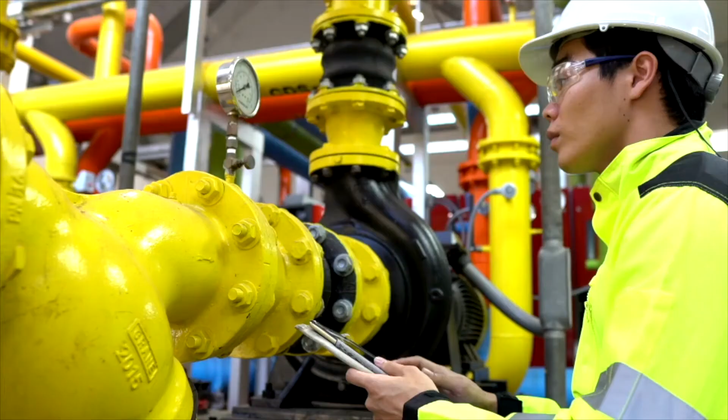So I want to talk to you a little bit today about what LNG is, how it's made, how it's stored. I want to talk about how it's used, and I want to talk about some LNG hazards. And this will, I think, complete an overall picture for you about what we're hoping to do or what we can accomplish with LNG in helping Europe.

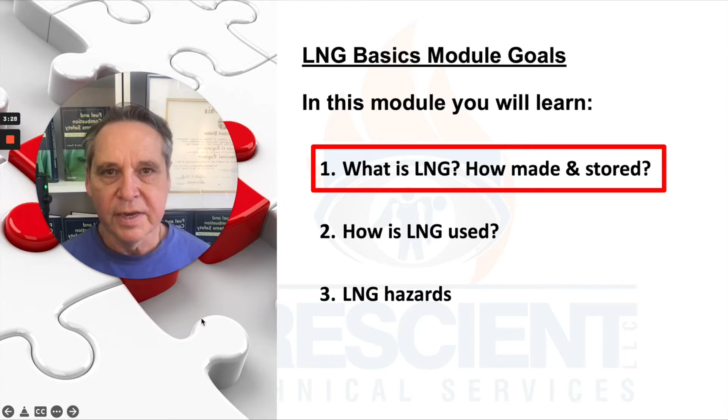LNG was originally developed as a means to help balance pipeline supplies. So quite some time ago, when there was a limited number of wells, wells produce at some rate, and it's usually a declining rate from when they're first discovered and put into service. That's why you always have to have new wells coming online. But if you think about it, most of natural gas usage, at least here in the United States, it's a seasonal type of thing. A lot of it's used for space heat. So you got this big seasonal imbalance. Well, how do you deal with that?

Well, in some places there are caverns to be able to store gas. They store it under pressure. But in other places where there's no other storage available, the technology has been developed to first liquefy it, which means you get it very, very cold and it changes phase, just like steam comes out of liquid water. Well, natural gas comes out of liquid natural gas, or vice versa. You condense steam into water. Well, you can condense, in essence, natural gas. The first evolution of this was to create liquid natural gas and to use it to supplement pipeline capacity. And then it was in later years, kind of recently, that it's been able to be exported.

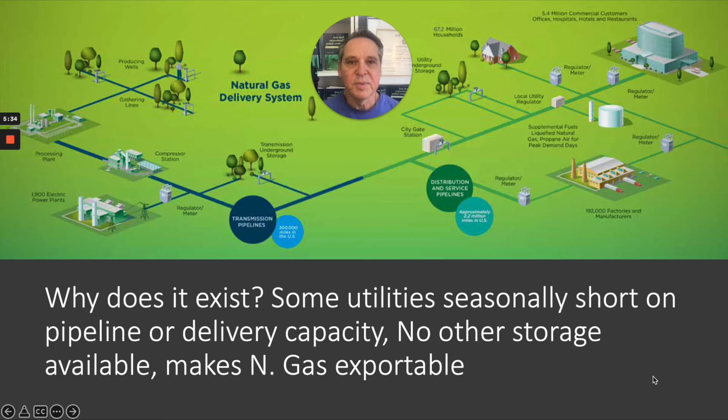There is a safety standard, by the way, if you're interested in some of the details of how this is done safely, requirements for constructing facilities and operating them. Well, they're in NFPA 59A. I'm a recent member of the NFPA 59A committee. You've got to remember that LNG, well, it's liquefied natural gas, but the commercial term natural gas means that something is typically 95% methane and 5% other things, some other hydrocarbons, maybe some inerts, but LNG is 100% methane. So it's created and stored as a liquid at minus 268 degrees Fahrenheit.

When you first take natural gas, you've got to then take it to a facility, an LNG plant, where you've got to remove all of those other things so that you just have pure methane, because they don't behave the same when you try to get them very, very cold. They condense at different temperatures and they have different properties and characteristics that are not desirable if they stay in the mix. So you get it very, very cold, suddenly it condenses, it turns into a liquid, and it's a 600 to 1 volume reduction. Then in very specially designed structures, tanks that have special chemical compositions of the steel, and that was learned the hard way, and I'll show you that in a few slides.

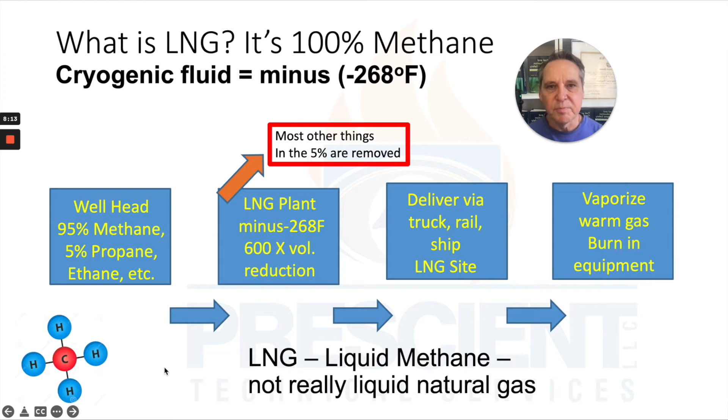You can store this, you can truck it around, you can send it on ships, on rail cars, and you could take it to a site that has vaporization equipment. You then have to vaporize it so you get substantial quantities of the gas available. Then you can inject that into a pipeline. A few more details I'm going to go over about that.

So throughout the United States, throughout Europe, there are interstate pipelines. There may be 1,000, 1,500 pounds pressure. Local distribution companies like your local gas supplier might take off of this pipeline. They reduce it in pressure, and they may or may not have a liquefaction plant. That's where you're actually condensing or turning this gas into a liquid.

So one of the struggles with providing LNG to Europe is that we likely have to have more liquefaction plants created here in the United States. It's very specialized equipment. There are compressors involved to create the refrigeration cycle needed to get very cold temperatures. It's very long lead time. It's very complex. You have to have permitting and siting for the locations of these facilities.

You have to have storage tanks on site to store what you've liquefied. And it's all a very highly regulated, highly complex, very intricate process. You just don't decide to create one of these and throw it up in a few months. They're typically years in planning and construction.

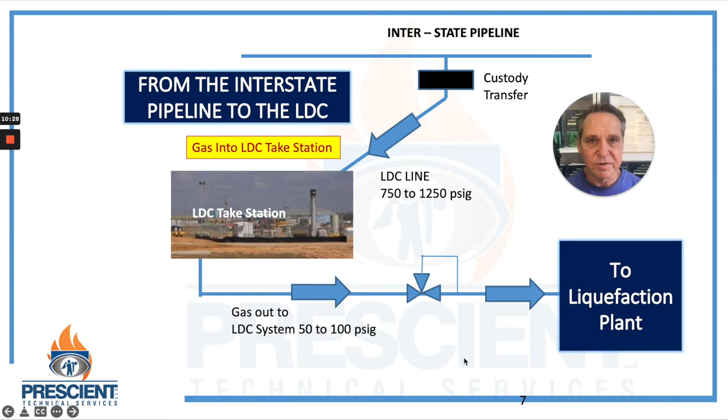Like I said, these tanks are typically double-walled, insulated. They're specially constructed with a lot of things considered in the planning. There's typically diking or some type of distance requirements in case there's leaks. There's been all kinds of testing and analysis of how to locate these, how to protect these kinds of tanks, what they should be created from. And typically these are very, very large tanks. And again, very specialized construction.

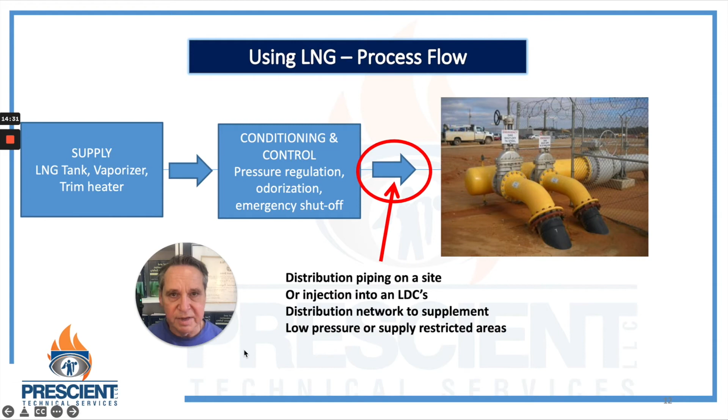And we slowly, gently transfer heat from the water into those coils, and it vaporizes, boils, if you will, that very, very cold liquid and turns it back into a gas. But you may have many, many burners and large quantities of these water baths to actually vaporize lots and lots of LNG at the same time. So again, I'm showing you this because I'm trying to get the idea in your head.

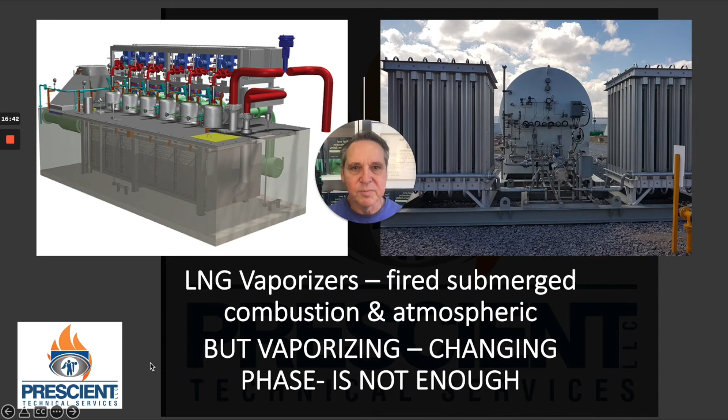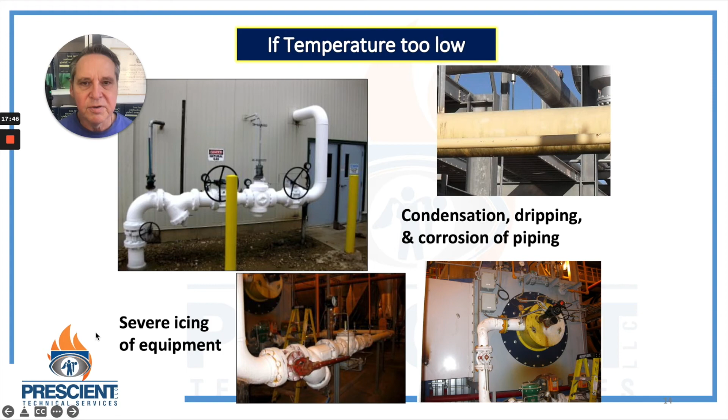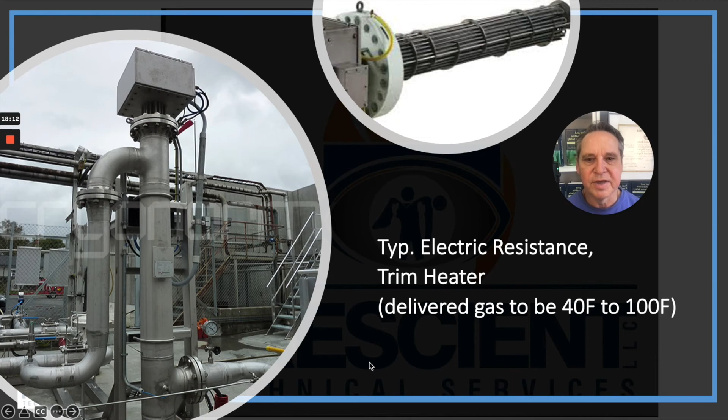Now, these icing pictures also happen when you reduce pressures dramatically in conventional systems. So most facilities have gas pipeline heaters. This is another whole set of equipment that needs to be purchased, carefully designed and installed when you have LNG systems. This is an electrical trim heater on that small atmospheric vaporizing system that I showed you that was for an industrial plant that we helped retrofit. And this is a somewhat larger fired water bath heater that's associated with larger quantities of vaporization at a site.

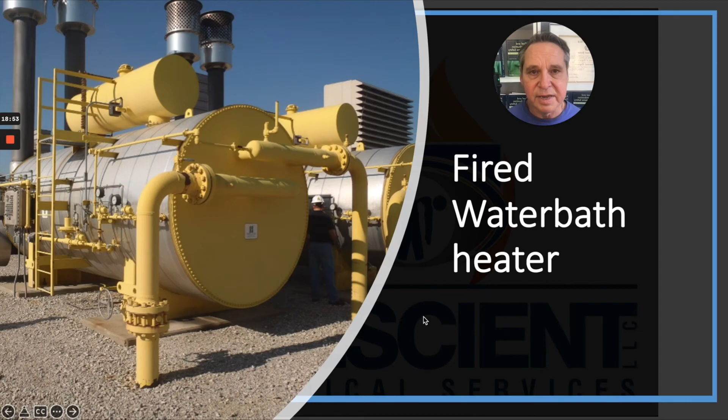So again, it's liquefaction equipment. It's shipping this material. It's receiving and then vaporizing this material. It's then getting it to a suitable temperature to be able to put into an existing pipeline system without causing damage. So what about some LNG hazards?

Is LNG inherently dangerous? The technology to create, transport, and use LNG safely is well developed today, but it wasn't always that way. In fact, one of the most horrific, worst LNG disasters of all time happened just a few miles from me here. I'm coming to you from my studio here in Cleveland, Ohio. And on the other side of town, in October of 1944, was the worst LNG accident in history.

The four basic LNG hazards out there are that LNG is a cryogenic liquid, just like liquid nitrogen is a cryogenic liquid. So these things, when they start to get warmed up, can expand rapidly, especially when they change phase from a liquid to a gas. Remember, this is a 600-to-1 volume reduction. So when you heat it, it expands in volume 600-to-1. And if you trap some of that liquid in between two valves in a section of pipe and you heat it, or if a pressure relieving device should fail, of course it generates a lot of pressure and that could be a problem. Also, if there are leaks, of course, or a release of LNG, it's methane, it's flammable.

When there are large releases of LNG, it condenses the moisture out of the air. Methane can displace oxygen, so it's an asphyxiant. And contact with cryogenic liquids or fluids, well, they create skin burns.

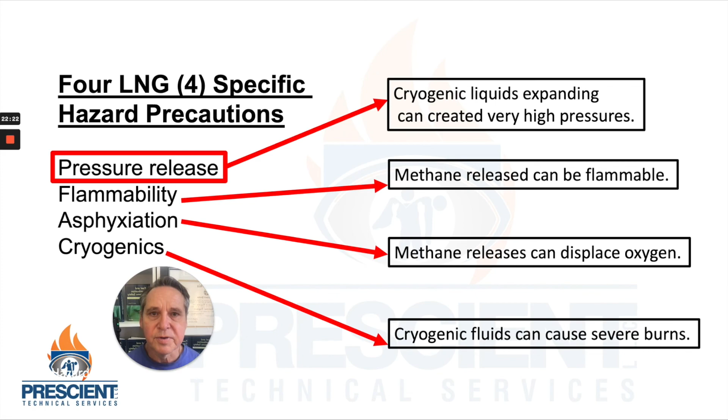So again, I hope I've provided you with some insights into what LNG is, how it's created, how it's used, and I hope this helps you to better understand some of the issues that are in the news today. I hope you now understand that although we can create and send more LNG to Europe, it takes lots of infrastructure, it takes lots of time, it takes lots of planning. We're especially hampered today with supply chain issues, the cost of commodities.

You should know that the technology for making LNG safe and a very effective energy solution is here today. But as I've explained to you, and as it's explained in the article, it's unfortunately not going to be able to displace all of the pipeline gas that Russia is making available. This will take some time. I hope that you've learned something valuable.